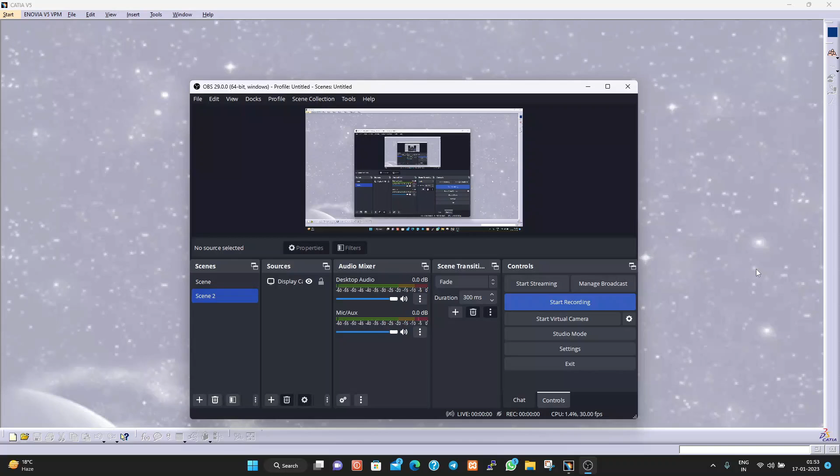Today we are going to design a gear. So for that we are going to go with the mechanical part design, and let's hit OK.

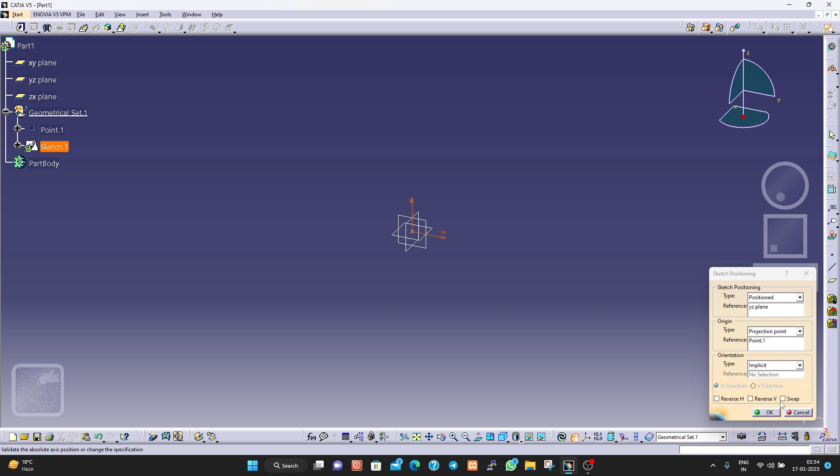So the workspace is ready now. As usual, we are going to select a point over the center, and with the projection sketch or positioning sketch, we can select this plane, and the point projection point will be the same as we defined before. Let's hit OK, and now let's design our gear.

For designing our gear, we can go with the circle first. That will be the center over here, and let's define it like this. And let's give it a radius of 50 mm, I think. Yeah, that will be okay.

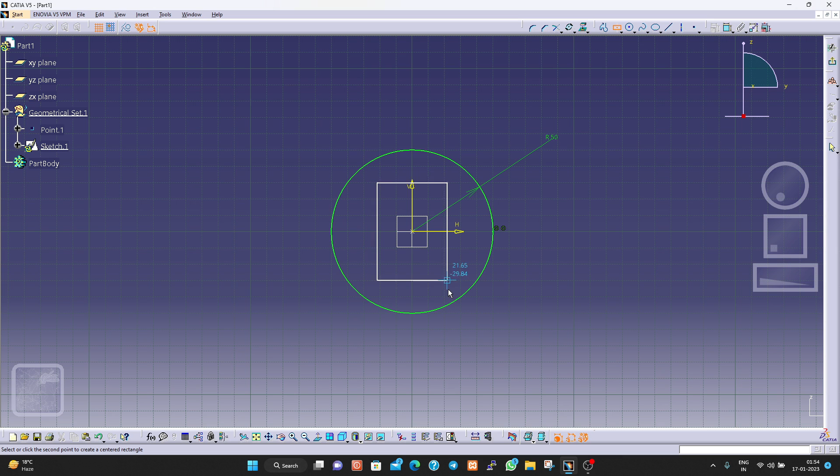And let's make a keyhole for that. So let's give it like this. And let's define this face to be 30 mm, I think so. Yeah, that will be okay. Let's go with 25 mm.

And for the height, what we are going to do, it's 50 for the radius and 5 mm above, so 55 mm will be sufficient. No, actually let's go with 60. It's not sufficient.

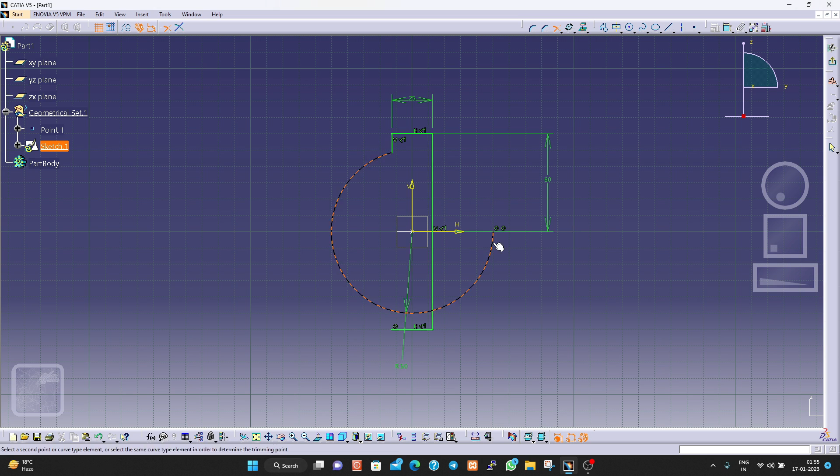Yeah, and now one thing we can do, we select this tool and let's merge with this one. Sorry, select again this one and let's merge with this. We can make it a construction object.

Now the second thing we have to do is make another circle for this. So let's go with this, and let's give it a radius of 60 mm or 80 mm.

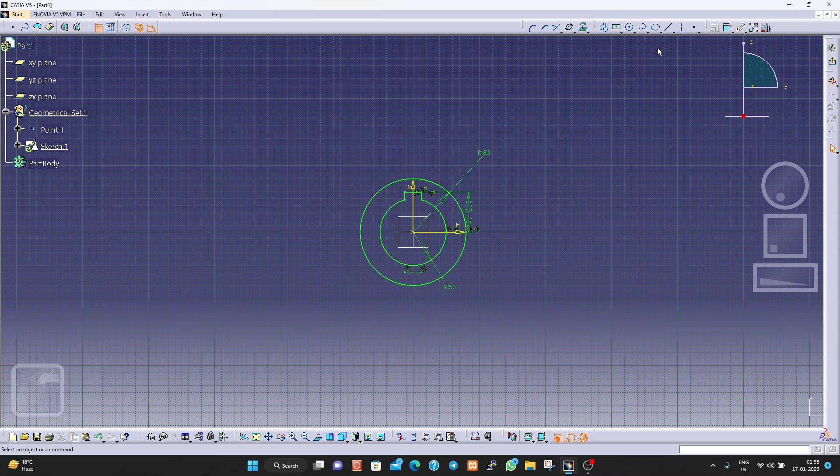And one more circle we have to make like this, and let's give it a diameter, sorry, a radius of I think 120.

Yeah, let's exit. Let's extrude, that means we have to pad this. Let's see what it looks like. Actually we don't need it like that, so let's delete this one.

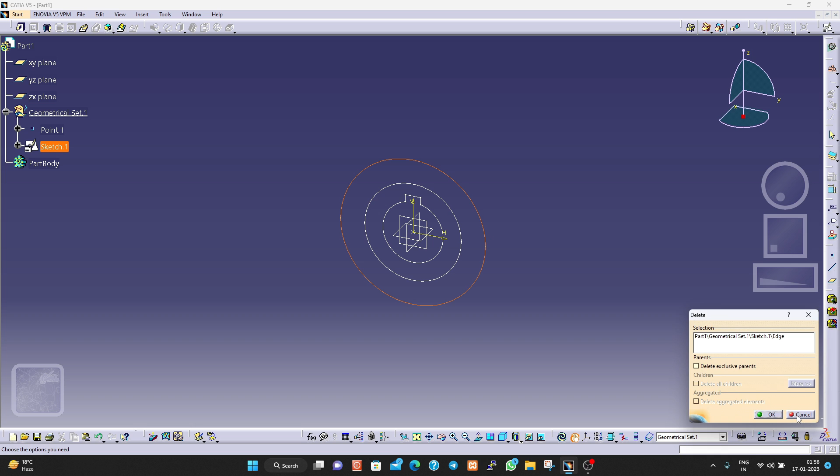Sorry, not like that, we have to edit this one. Let's delete the outer line, I mean the outer circle, and exit.

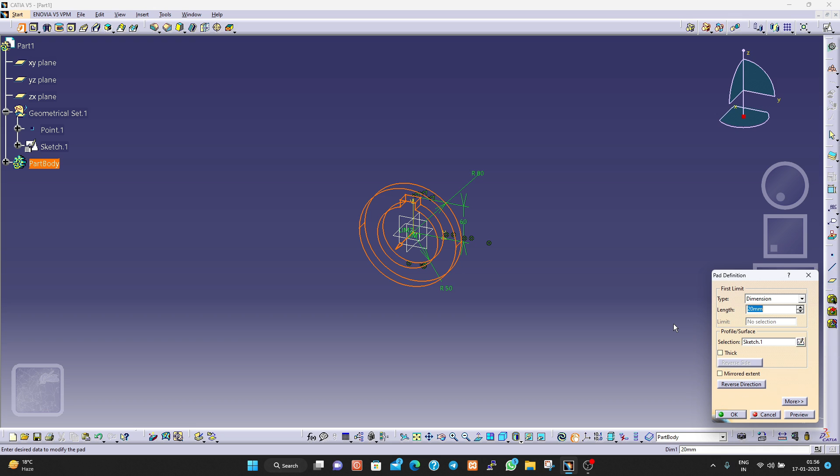Let's pad this up to 20 mm, or we can go with 80 mm. Let's preview this one first. Yeah, it's looking much more relevant.

So another projection we have to make, with the same plane and the point. Let's select the projection point like this. Okay, and let's select this line and make it a reference line.

And what we can do, we can hide this one, not like that. Now what we have to do, we have to select this circle.

And let's make a circle of 120 radius, and another the same as, I mean the 80, that is this circle.

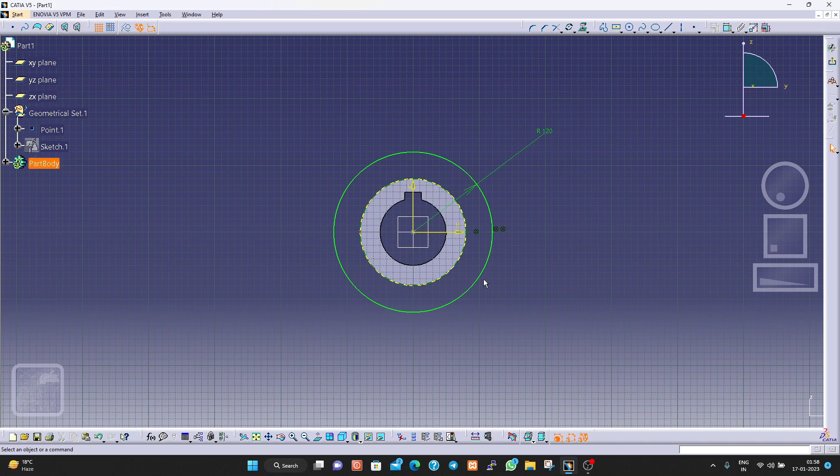Let's again give it a dimension of, we don't need actually the dimension for that, but let's control Z this one, select this one, delete this. Does that work? I don't think so.

So let's extrude, let's see what happened with that. It's perfect. Preview, and I think that's okay.

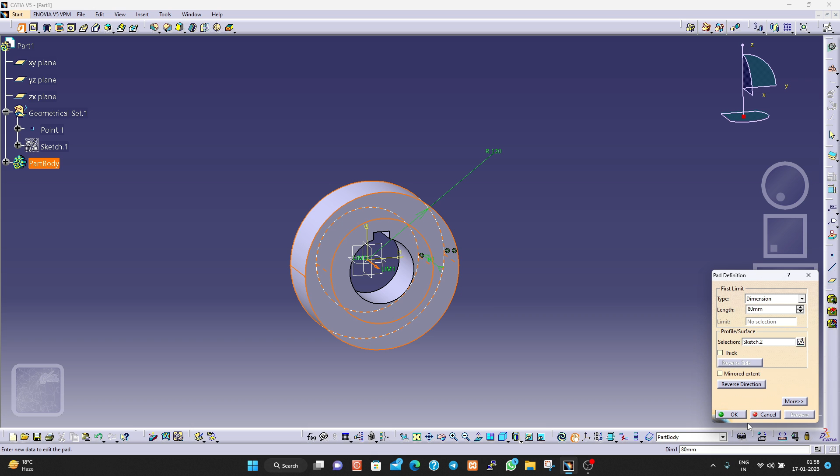Hit OK. And now what we have to do, we have to project this plane on the top. So let's take a plane, let's drag it like this. It's 105 mm, that's okay.

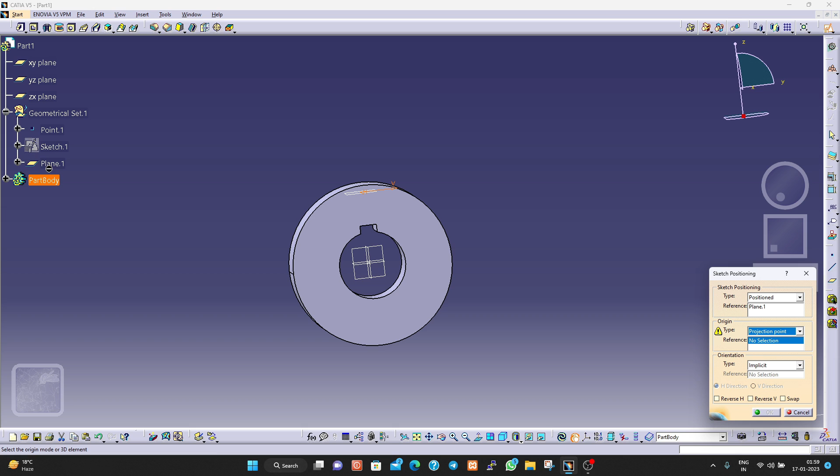Let's hit OK. Let's draw, let's make some sketch over here by selecting that plane, and let's point it to the center. Let's hit OK. And now what we have to... where does it go?

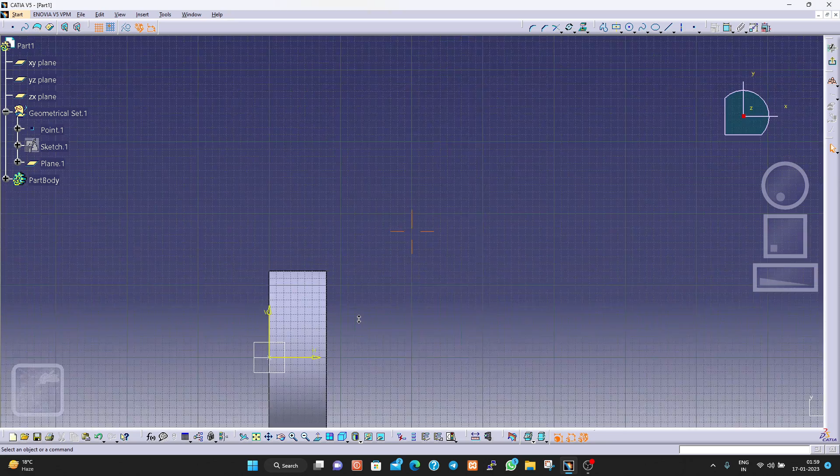If we click this again, that's okay. Let's make some design over here. For that, we're going to select the simple rectangle, and let's make a rectangle like this, or we can exit.

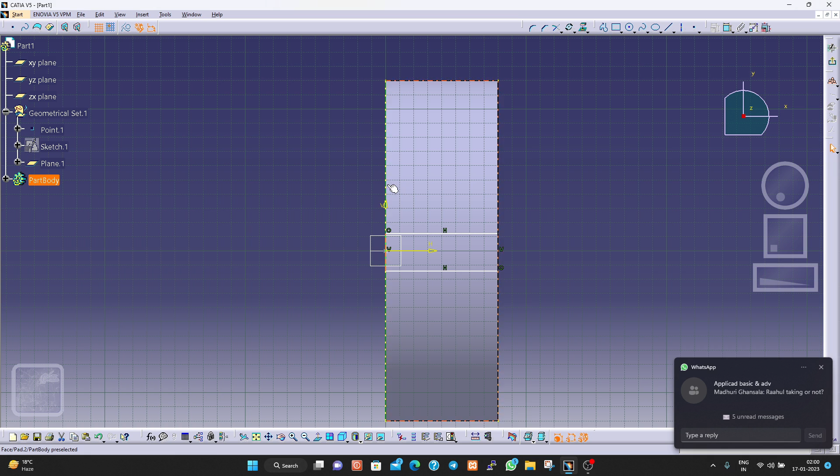Let's make some line visible over here. Now what we can do is select a rectangle, go with the line, merge with this one, select this one and this one, and make it the construction line. This one too.

Now we can define this. Let's define with the center to be 5 mm or 10 mm. Let's go with 10 mm, and same as the bottom one, this one with the center will be 10 mm.

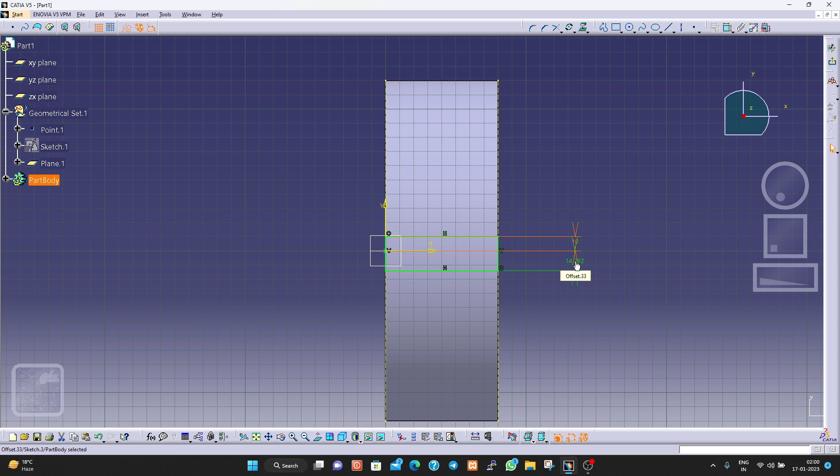So it's an ISO constraint. Now what we have to do is exit, and let's pad this surface plane that we have created over here.

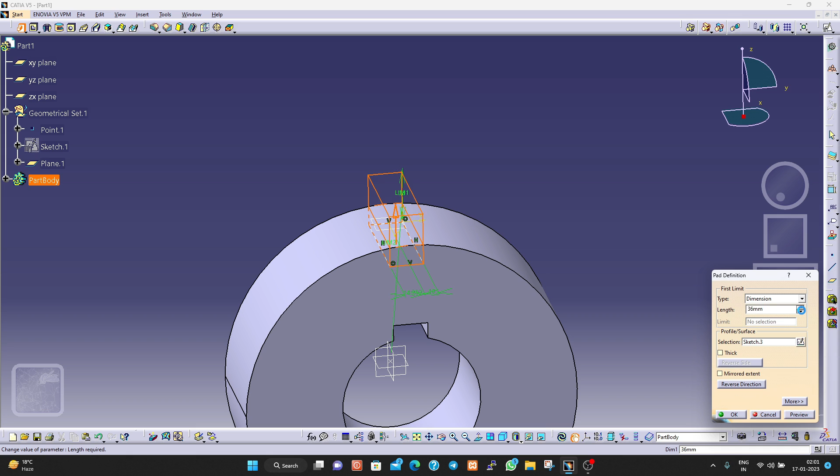Let's select this, sorry, let's pad this first and select the projection. Let's decrease it up to... I think we could go like this, and see from here.

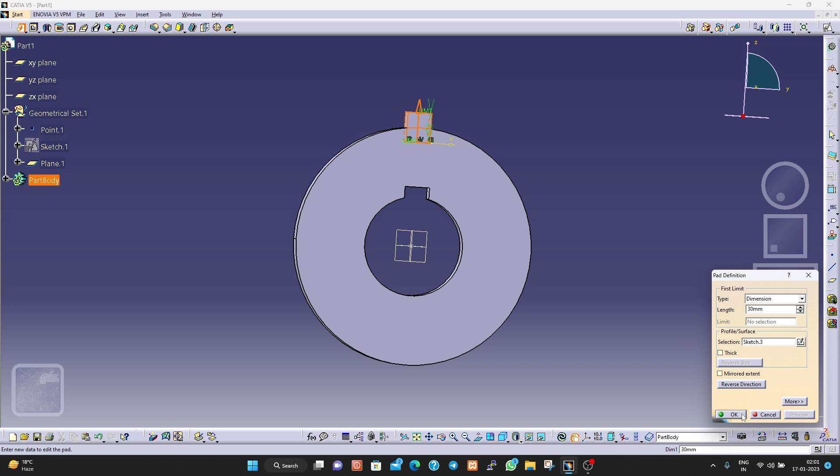25 I think will be okay. 26, 27, 28, 29, 30 is much better. Let's hit OK. And now what we have to do is rotate this one.

So for that, we have a tool over here, this one, and we can select the reference element, not like that, and we can select the reference element, this one. Let's go with 16 first, and this will be 10 degrees.

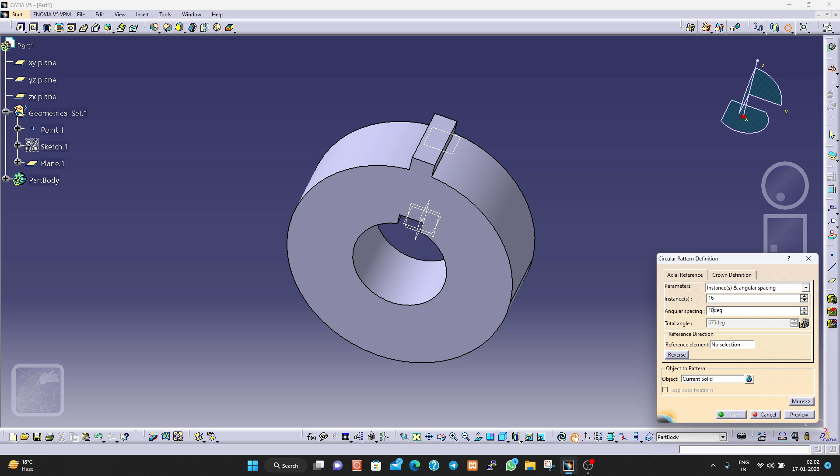And let's select the surface. Yeah, let's increase the degree. 15 degrees is okay, and let's increase now the... yeah, that's okay. Let's preview this.

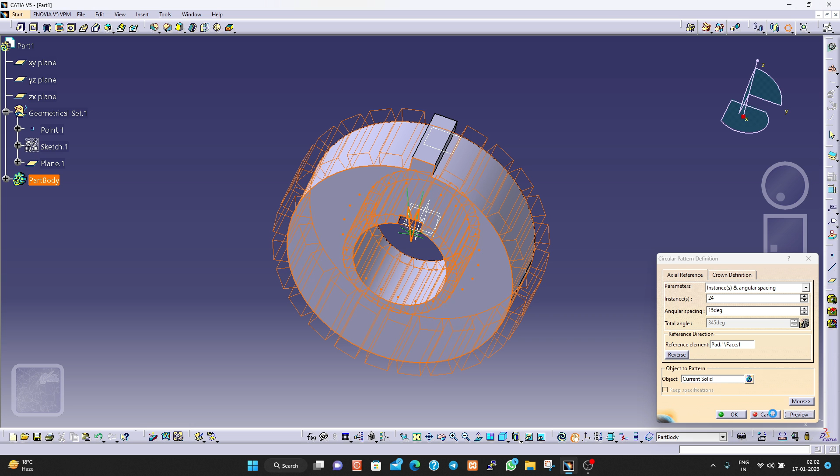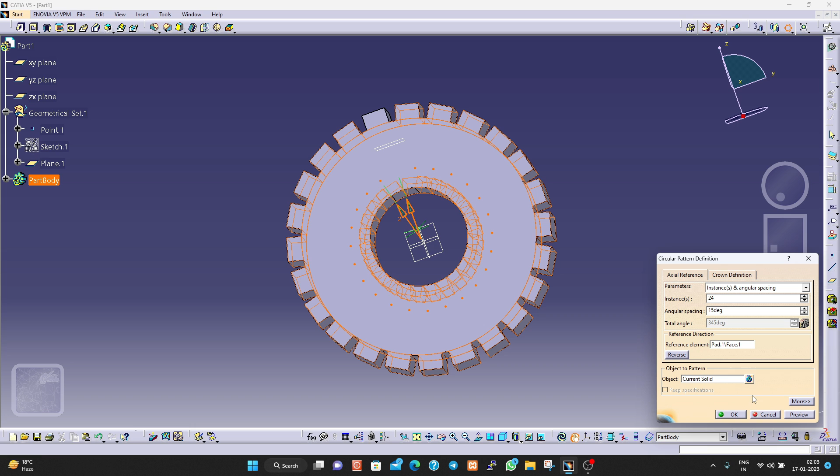If we see over here, the slot that we created earlier is gone, so we can work with that too again, but crown definition, axial reference, let's hit OK.

We can make another slot over here. So let's go with the pocket. It will work or not, I don't know. Let's cancel this. Let's select this plane, go with the normal sketch.

Let's create another center rectangle like this, and let's define this to be 30, and let's define this to be... what was it, I think 60, yeah.

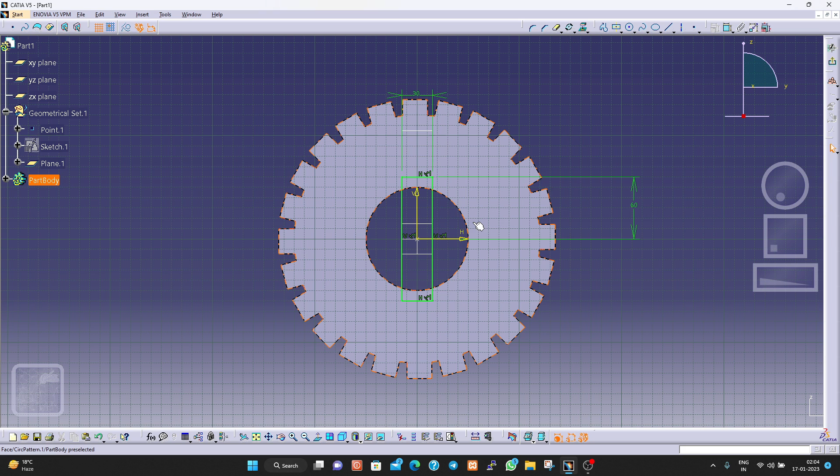And let's trim those objects out, not like that. One thing we have forgotten to do: select this line, make it like this.

Let's zoom in. I think we defined it wrong, it was 25. Let's go with 25. Yeah, it's perfect now.

Now what we can do is trim this up, not that, trim this up to this point, and again we can trim this up to this point, and it's over-constrained now.

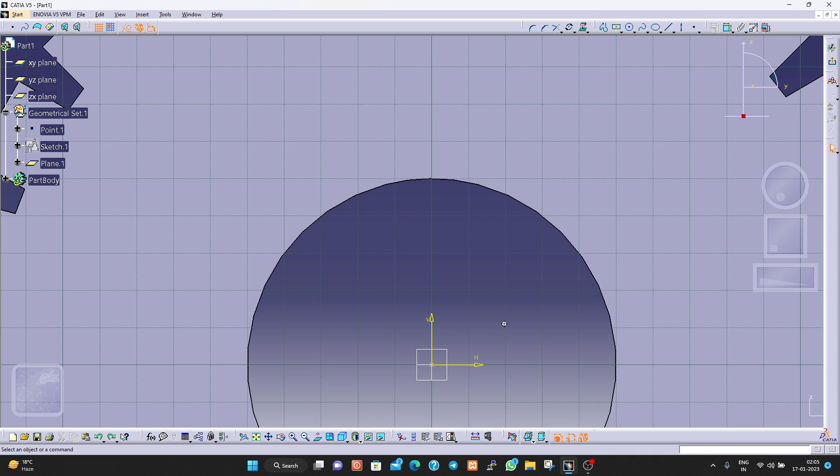We can go with sketch one, edit, and now we can see over here that the split is selecting this sketch like this one, making it... it will not work like that.

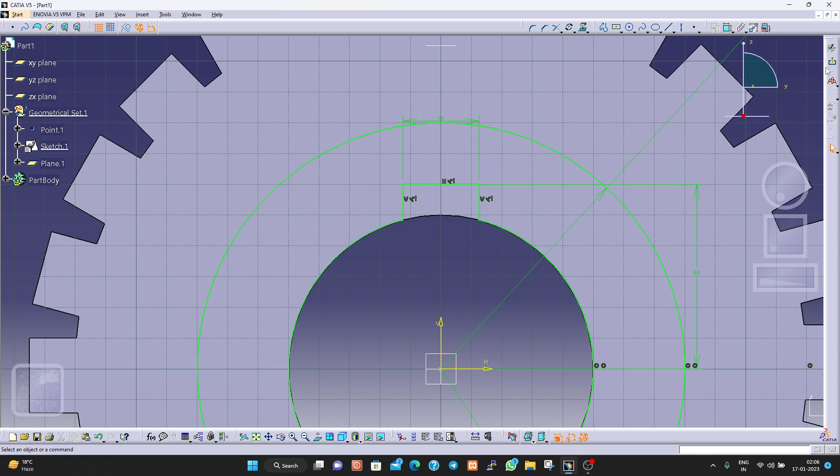Let's ignore this, we will see that later, but the gear is ready. One thing we can do is select that, and let's see, can we slot this.

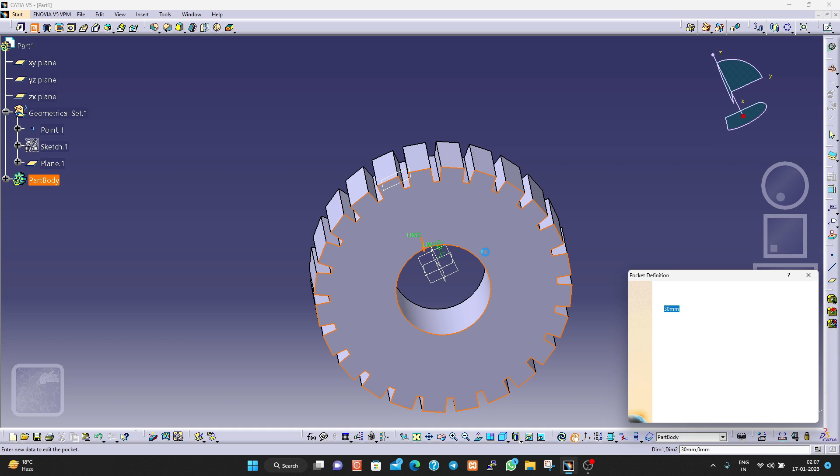Or we can... you have selected a surface face as profile, you must specify a direction of extrusion, do you want to define it? Yes, and the direction of extrusion will be on the top, that one.

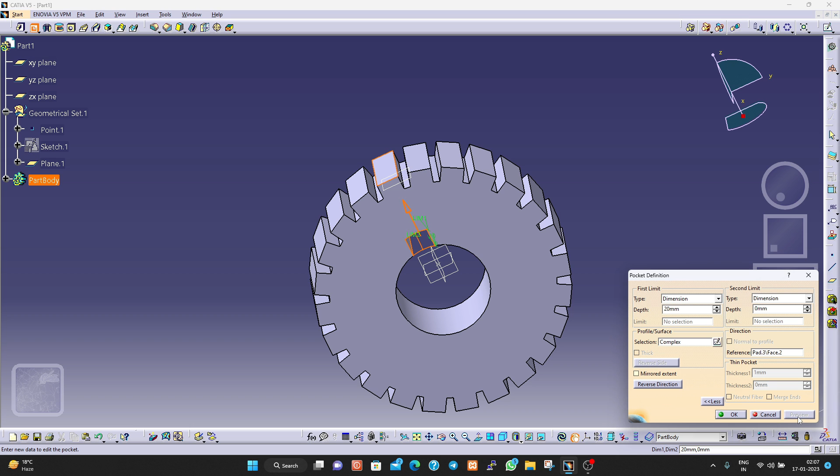If we select this one and again go with the pocket, yes, and this one is okay. Let's preview, it's a lot up. Let's go with 20 mm. Let's preview this, and I think our slot is ready.